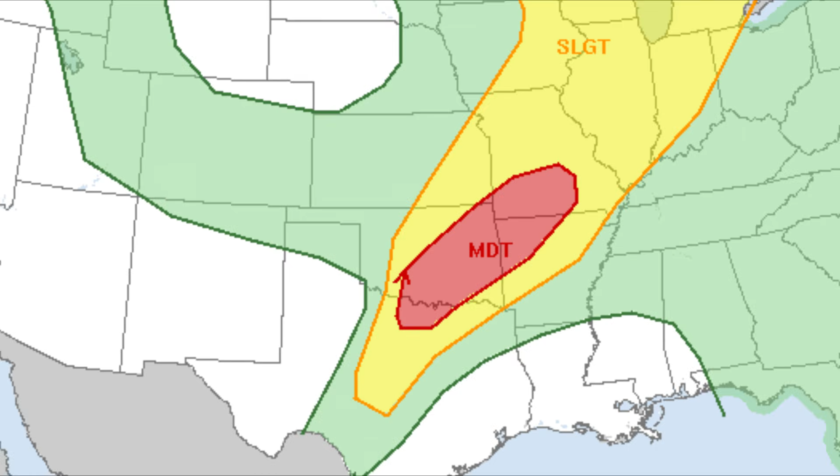Monday, May 20th, 2013. Forecasters at the Storm Prediction Center in Norman, Oklahoma, dial in their forecasts over their own homes as conditions align for an explosive weather day. Within a highlighted moderate risk, a 10% hatched tornado probability is denoted through Oklahoma. Even with this elevated risk, little did anyone think central Oklahoma would see weather history repeat itself.

My name is Ethan Moriarty. I'm a mechanical engineer by training with a fascination in tornado damage forensics. This is a damage analysis of the 2013 Moore, Oklahoma EF5.

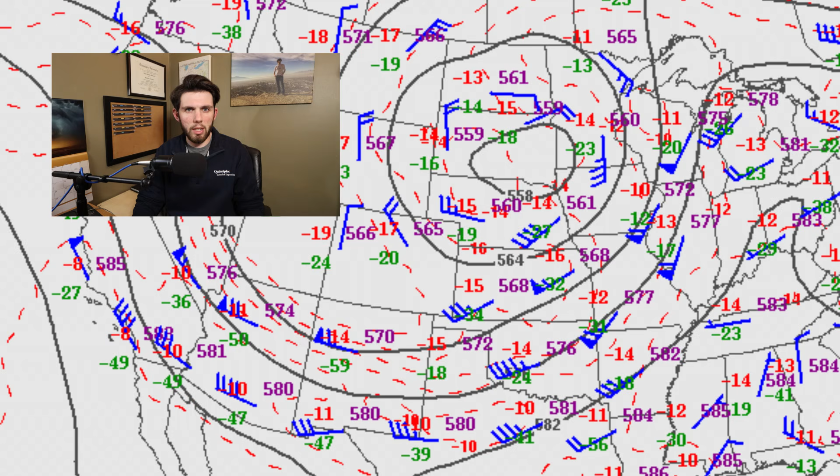Diving into the weather side of the equation behind this tornado, the system at large that was responsible for this tornado started with an upper level low over the northern plains of the United States. Associated with this upper level low was a giant digging trough that ejected across the southern plains and up through the Midwest. Moisture was abundant in the southern plains on this afternoon, with dew points reaching into the upper 60s and in some places even over 70 degrees Fahrenheit.

Associated with the strong surface low over the Dakotas was a stationary front that draped its way from the origin of the surface low down through Texas. Throughout the day on May 20th, there was an advancing dry line from western Texas that moved eastward into Oklahoma and eventually created a triple point over the localized low over the central Oklahoma region.

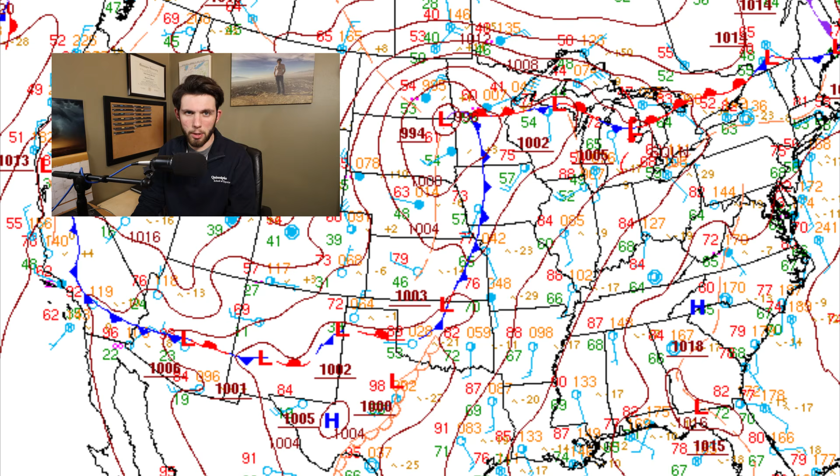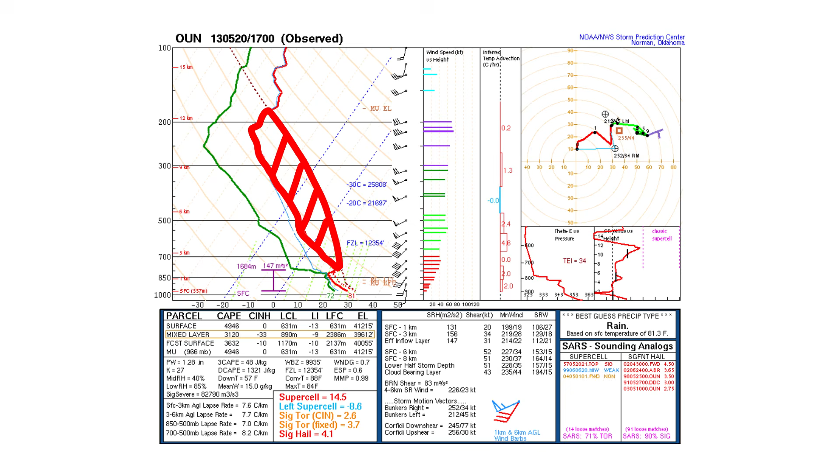A special midday weather balloon sounding was launched in central Oklahoma. This sounding revealed that there was over 3,000 joules per kilogram of mixed layer CAPE, as well as 5,000 joules of surface-based CAPE. The instability over central Oklahoma was rapidly growing, and the cap was quickly eroding away. Storms fired off the dry line a little after noon, and the storm that was closest to the boundary ultimately became the producer of the Moore EF5.

Now that we've gone over the tornado stats as well as the overall weather picture of that day, let's dive into the path itself and get an overarching look at the damage that was caused by the Moore EF5. Here I am quickly just zoomed out over the entire path. This one is relatively short compared to some of the high impact tornadoes that we've looked at previously. Some of them span 60 miles. This one's only 13, 14 miles in length.

And it is worth noting, due to the fact that this went through an extremely heavily populated area, there are well over 4,000 damage indicators in this path. So I have filtered a lot of the lower rated damage indicators out and left a lot of the EF4, EF5, and some of the unknown damage indicators in here because the sheer quantity of damage indicators is overwhelming.

This goes into how the survey was conducted. And this survey was an extreme undertaking. It required both ground survey teams and aerial survey teams.

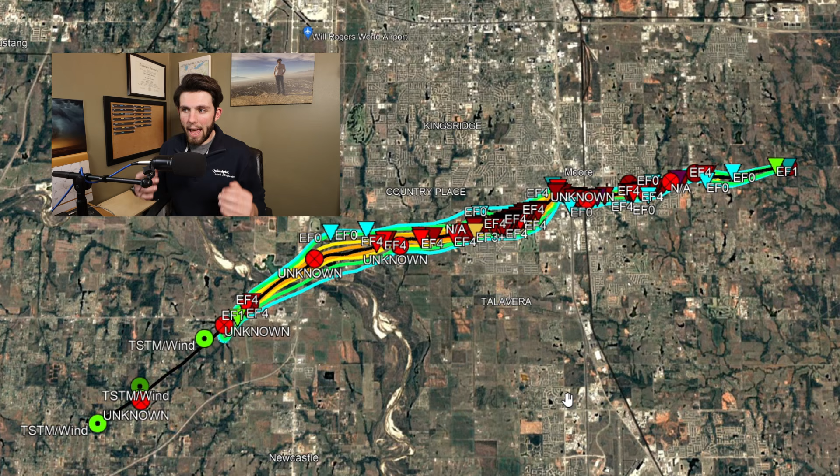So you had a lot of people on the ground looking at the highest impact damage indicators, and then a lot of aircraft involved that were kind of mapping the overall picture and a lot of the lesser damage indicators. So a lot of the EF1s and 2s, that type of stuff, were done through the aerial surveys. So it's not like there was a ground team that was reviewing those. They were focused on the heavily impacted damage indicators, if that makes sense.

Of course, after natural disasters, the natural human urge is to clean up a lot of the damage. So the survey team had a lot of data that they had to try to take in before people started really manipulating the scenes. So you have to give these people credit for being able to document this huge amount of data in such a short period of time. It is by no means perfect, but it is a nearly impossible task to begin with. So you have to take a lot of that in mind when we're looking at a survey that goes through a heavily populated area like the southern OKC metro.

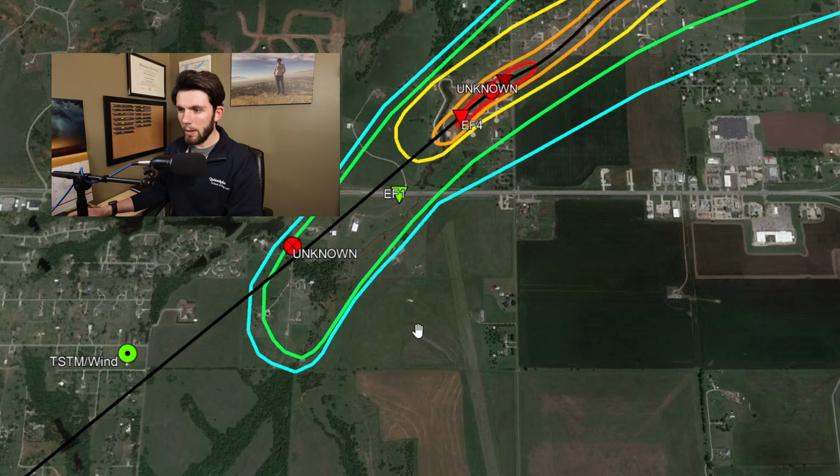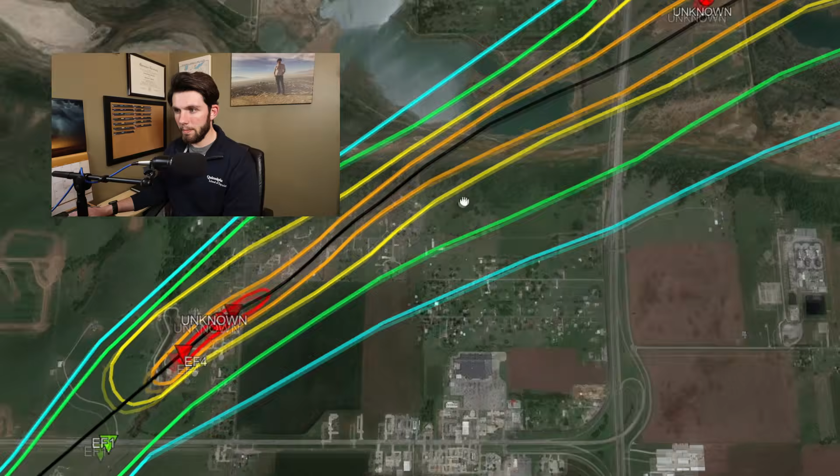Zooming in here to the first damage indicators, which happen in the northern section of Newcastle, Oklahoma. The tornado started just along Oklahoma 37 here and strengthened quickly, as we already have an EF4 damage indicator within the first kilometer of the path, I would say. Worth noting, from the original origin point of the tornado to by the time it takes its first real right turn, when that storm really latches on to the boundary at play, you can see how quickly it widened out in the initial phase of the tornado.

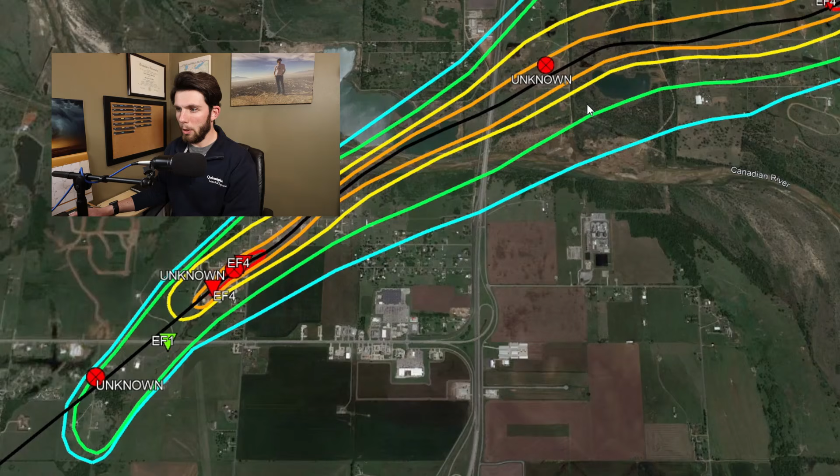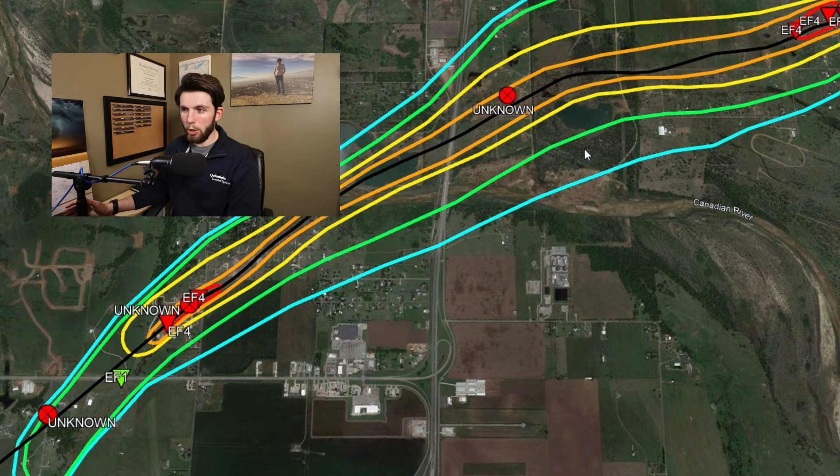So you went from the initial ground contact to almost peak width within a couple miles. So that's something that goes to show that this tornado matured very rapidly and was already at its peak strength basically before even entering the populated region of southern Oklahoma City and Moore.

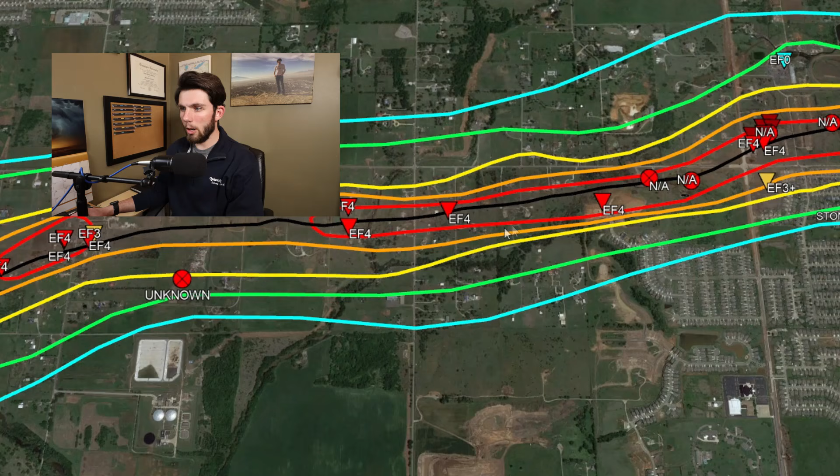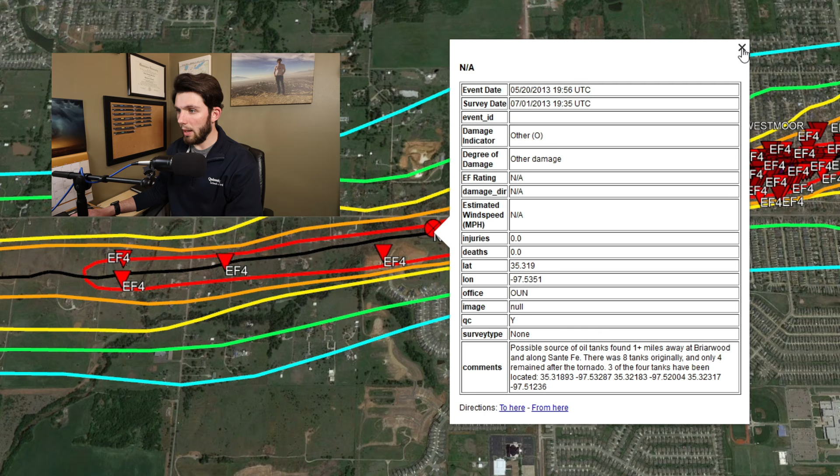In the southern Oklahoma City region of the tornado before it enters the town of Moore, there are a number of EF4 damage indicators and several interesting pieces of damage that we're going to dive into a little bit more in depth, including origin points of fuel tanks that were thrown in some instances over a mile. So we're going to look into what it would take to loft a fuel tank of that size, because fortunately we have geometry that they gave in the survey, as well as the weight. So that's really useful and makes our lives a lot easier. So we can look into what it would take to throw something of that nature such a far distance.

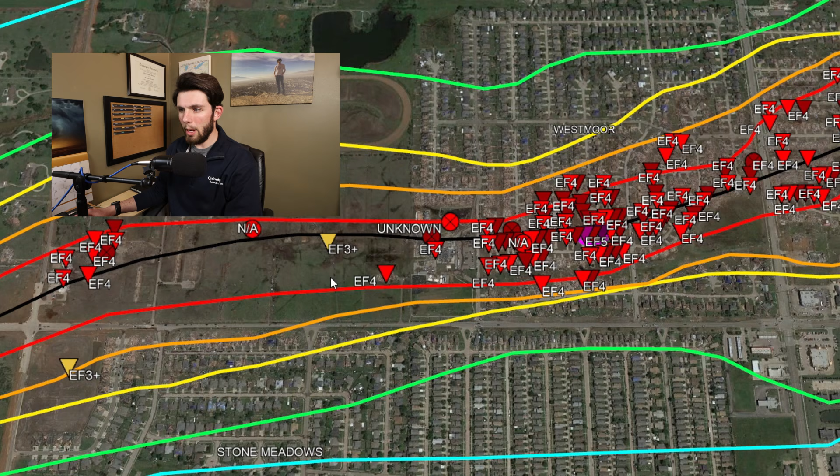Moving into the Westmoor neighborhood of southern Oklahoma City, this is where the Briarwood Elementary School was impacted, and some of the resting places of the fuel tanks that we were talking about earlier ended up being left behind. And then through the Westmoor neighborhood is some of the most intense damage of the tornado, including our first EF5 level damage indicators that were in the path of this tornado. It is worth noting that there are only 9 EF5 damage indicators in the entire path out of, I think, over 4,900 DIs in this damage path. That just goes to show how stringent the criteria is for an EF5.

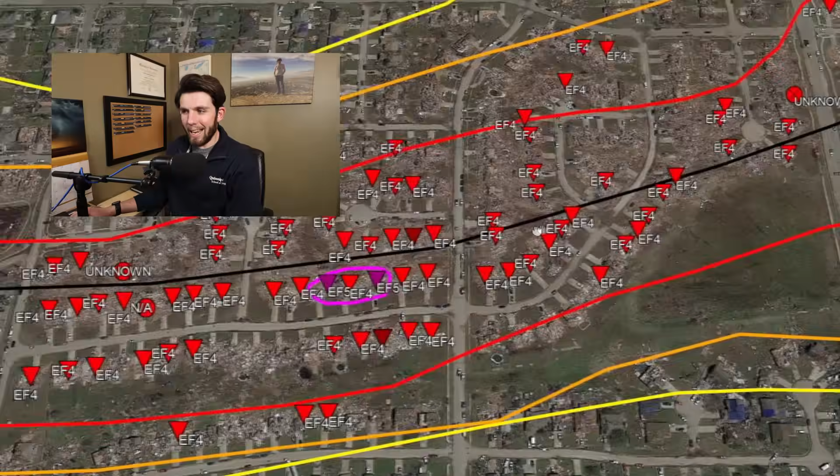And there's a good report on the survey and the damage overall that kind of lays the groundwork of what constitutes an EF5 damage indicator that I think is important to get into, but we'll get to that as we move eastward here. For the meantime, I think it goes without saying that the sheer amount of debris that is in this path is just overwhelming. And it is very hard to comprehend, and I'm not quite sure how to fully realize it. You know, I've been looking at tornado damage for a while now, and it is still hard to visualize.

I've never seen EF5 damage. The most intense damage I've seen personally in person is EF3, and EF3 is quite overwhelming. So to have an EF5 tornado through such a populated area is both gut-wrenching, pulls at the heartstrings, and is just overall depressing and hard to really materialize, to be completely honest, and really wrap your head around that something could be this powerful.

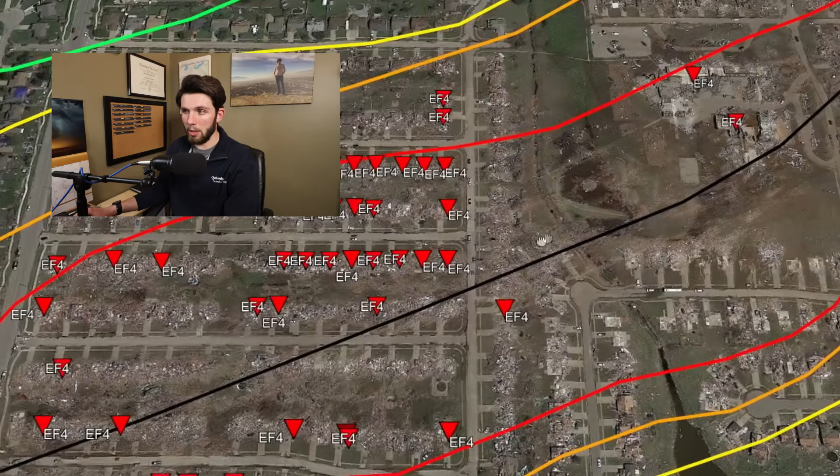As we move into the town of Moore, we pass the Plaza Towers Elementary School, which saw 7 fatalities at the school, which is honestly the most tragic part about this tornado, in my opinion. I mean, obviously, any loss of human life is tragic, but particularly at a school, that is really, really hard to deal with. And it's one of the saddest parts about this tornado. There's really no words that can be put to it, to be completely honest.

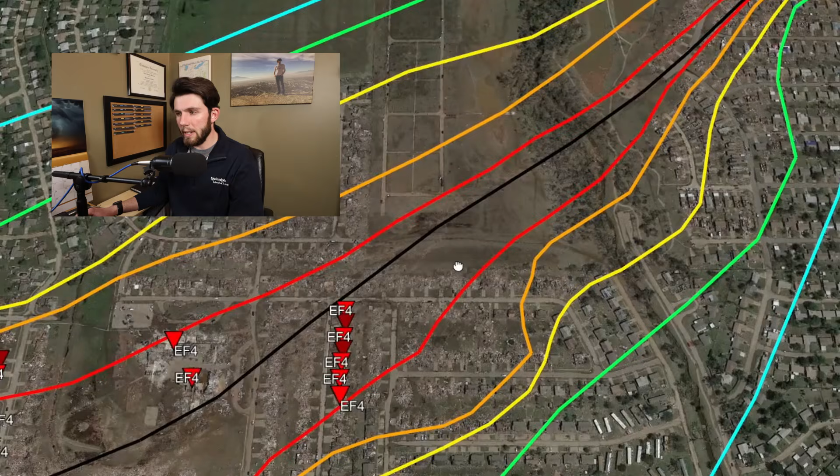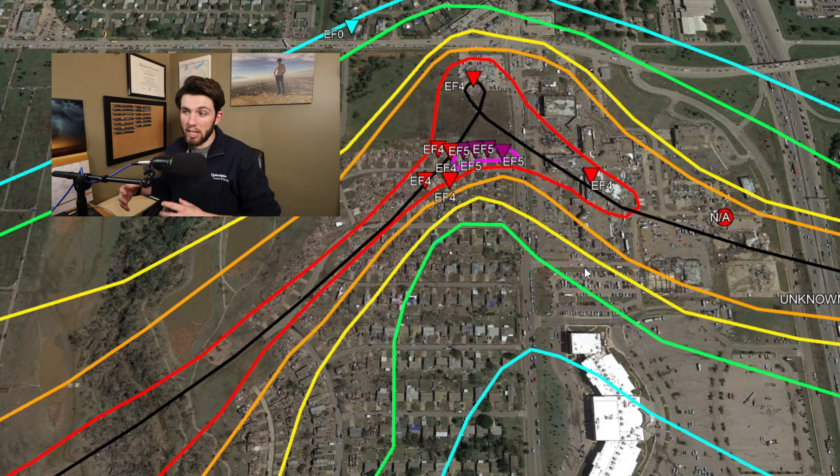The tornado would continue northeast again before executing almost like a loop style turn. I wonder if the storm cycled, or there was some sort of occlusion handoff type of thing between mesocyclones of the tornado. I'm not really sure. I'm not a meteorologist, so I don't really have a good explanation as to why there was this sudden kind of shift in direction that brought this tornado back in an easterly trajectory versus a northeast trajectory.

But I think it's worth noting that because the tornado stalled out here, there's a string of 5 EF5 damage indicators here. And arguably, I think these are the most conclusive EF5 damage indicators in the path, if you ask me. And it probably has to do with the fact that the tornado spent the most time as it executed this kind of maneuver over these houses. So it's no surprise that there was a concentration of EF5 damage indicators. There's also the gas station and convenience store up here in the corner that there were 3 fatalities at.

And then eventually, as it jogged back to the southeast here, it impacts the Moore Medical Center, where cars were thrown all over the place, mostly in the southeasterly direction. And it's also noted in the survey that 1 car was found on top of the Moore Medical Center on a 2-story section of it. So I think it goes without saying that an EF5 tornado is going to be throwing cars quite the distance. So it's completely within the realm of possibilities to have a vehicle that ends up on a roof.

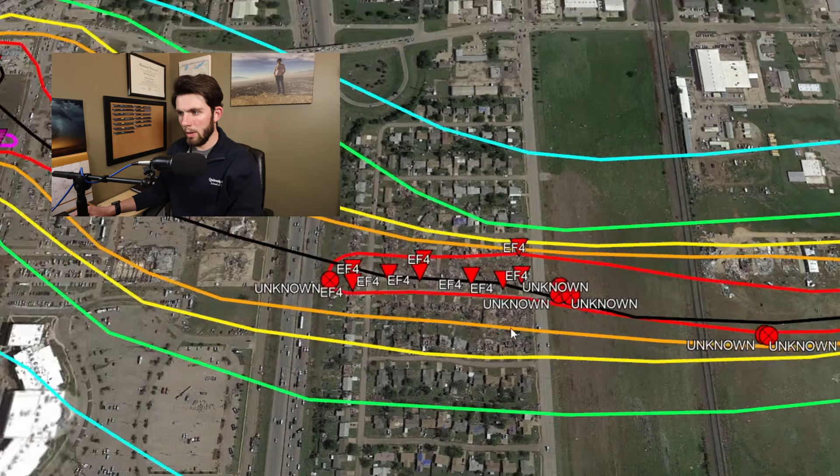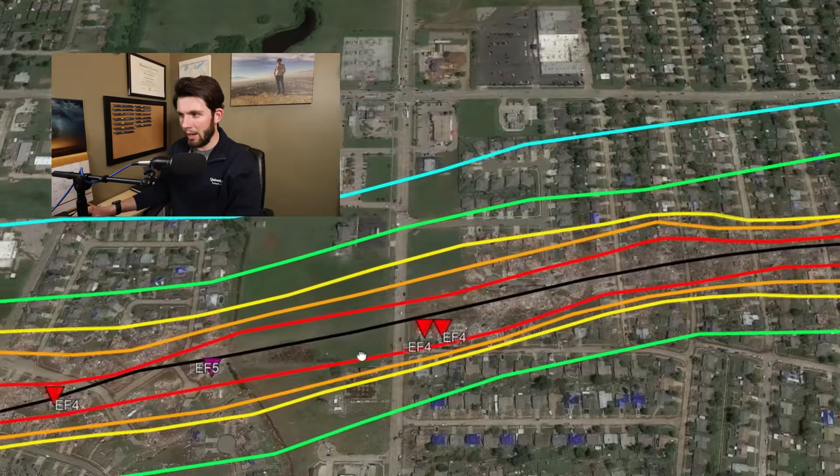The tornado then continues east over Interstate 35 and eventually makes its way into the eastern half of Moore. We still have damage indicators that are exceeding EF4. There's a couple more instances of EF5 along the track. But I think it's interesting here that the tornado kind of thins out a bit as it reaches this eastern portion of Moore. As you can see over here in the southern OKC region by the Briarwood Elementary School, there was a much wider swath of damage, even to the EF0 extent, versus what's happening here in eastern Moore.

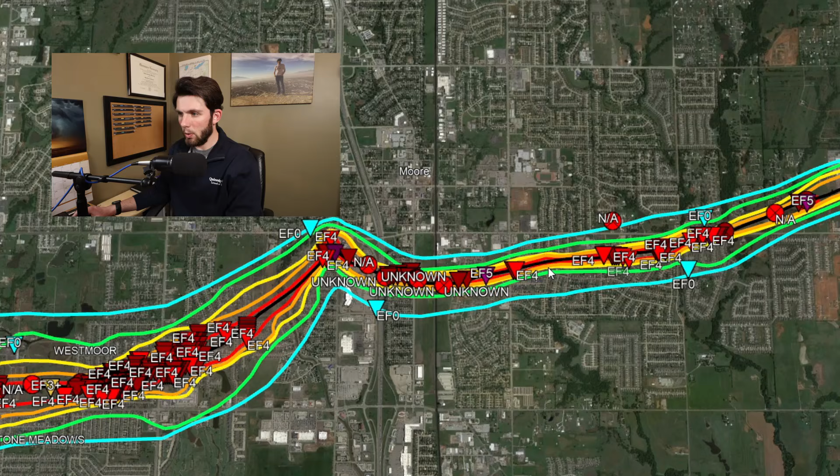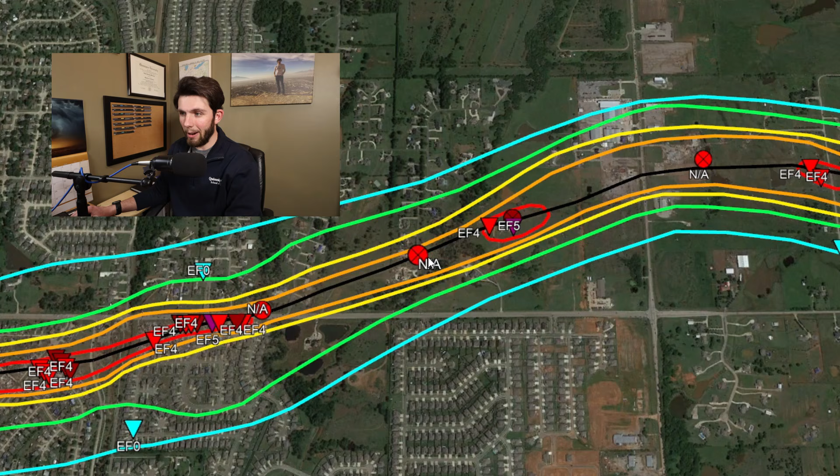Just something interesting. I wonder if that has to do with the cycling of the storm as a whole or something along those lines, but I just think it was worth mentioning that the width of the tornado actually kind of decreases towards the end of the path here. As the tornado finishes its way through Moore, it's still at very high intensity with a couple more EF5 damage indicators before finally reaching the outer limits of Moore and beginning to rope out and dissipate.

Now that we looked at the damage path as a whole and get a sense of where the damage was and where the key landmarks are, let's establish what the criteria was for an EF5 damage indicator. The criteria for an EF5 in the case of the Moore 2013 EF5 is spelled out in the official report of the damage survey, which is written by Donald Burgess as well as engineers like Tim Marshall. In the report, there are 4 criteria for a damage indicator to be assigned EF5. Reading directly from the report, let's look at the 4 criteria in depth.

Number 1, foundation swept clean with debris strewn some distance downwind. 2, foundation generally slab to base plate connections with properly spaced bolts with properly fitted, sized, and tightened washers and nuts. 3, removal of large percentage of those base plates from the foundation. And 4, anchor bolts that have been bent, which means that the frame had transferred the wind load into the foundation base plate connections.

The reason why some of this criteria was spelled out in the report is so that there was an equal measure to compare this to the May 3rd, 1999 event, which obviously was the landmark event for a high-impact tornado in the OKC metro area.

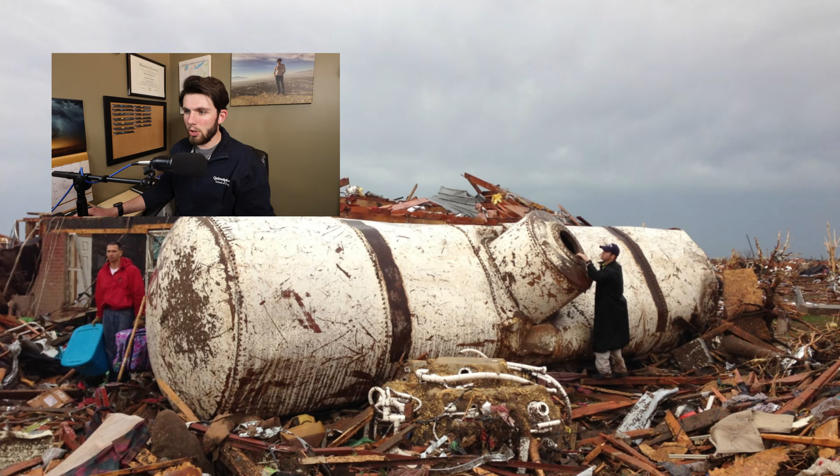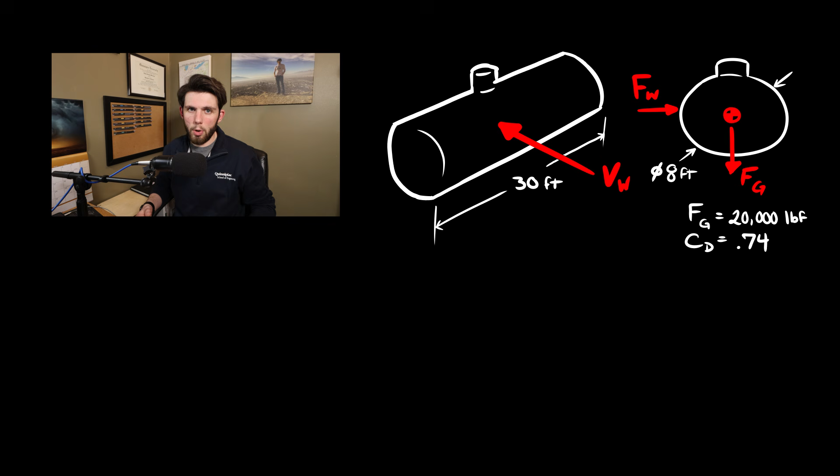Let us now dive into the propane tanks that were found thrown over a mile and see what it would take to throw something of that size and weight a significant distance. Here we are just east of the Briarwood Elementary School, where we have this unknown damage indicator which shows one of the propane tanks that was thrown from the farms further west. To start off, let's establish the geometry of the tank. It is 30 feet long with a diameter of 8 feet, and it weighed 10 tons according to the details in the damage indicator survey text field.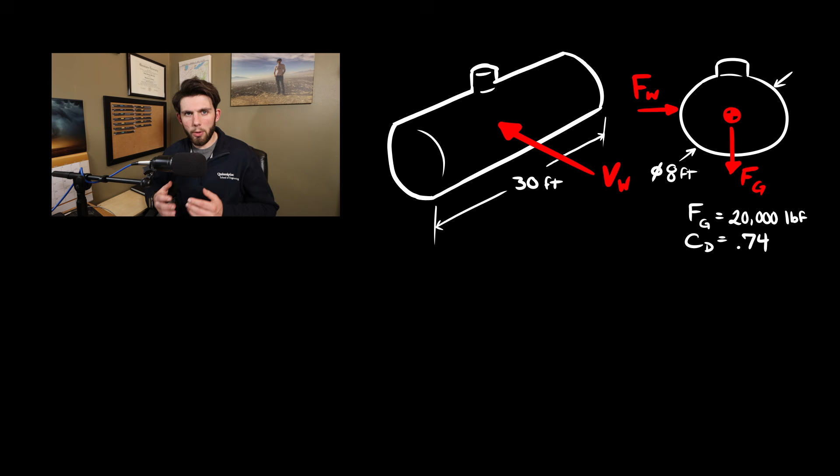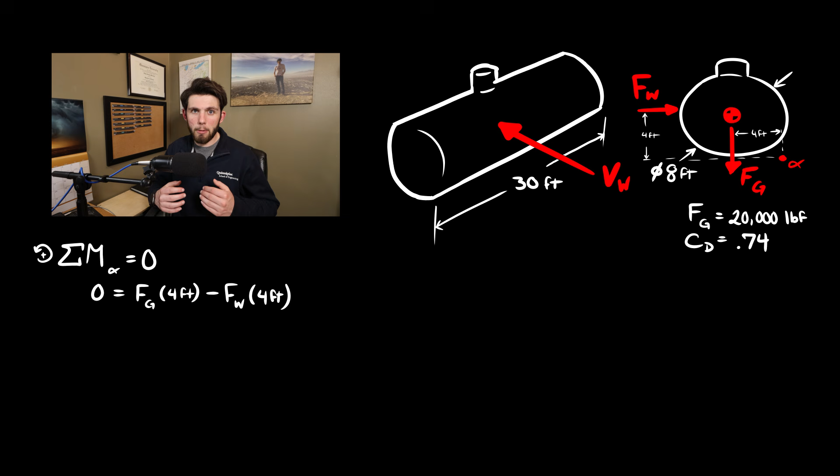To figure out how much wind force it would take to overcome the force due to gravity, we're going to compare it via a sum of moments. So once again, we'll pick a point where there's going to be a moment, and then we take the distances from that point to where the forces are applied in order to balance out the forces, and then compare the two.

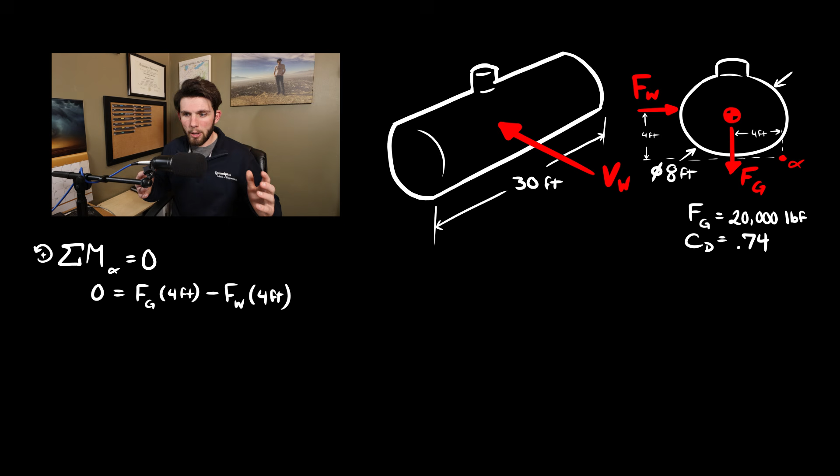So fortunately in this case, because it's just a cylinder and we're putting the tipping point at the same distances on either side, the two distances just cancel each other out, as they're both just the radius from the center of gravity of the tank. So ultimately, it's pretty straightforward.

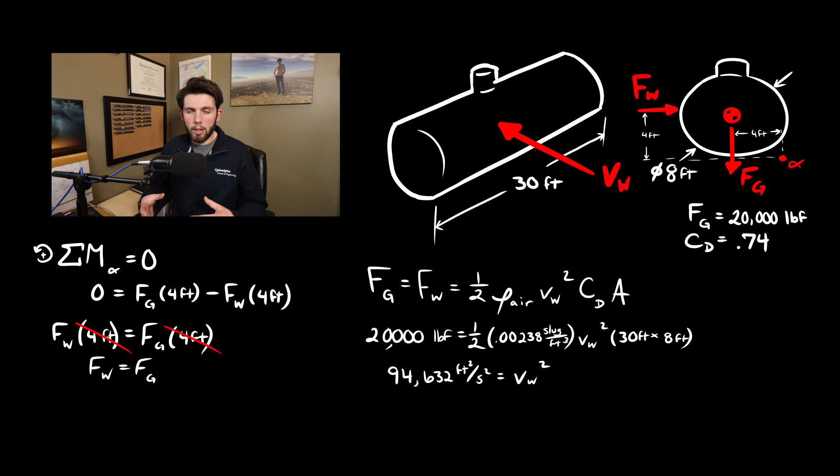We just compare the force of drag equation that we like to use with the weight of the tank and set that force of drag equation equal to the weight, and using the geometry as well as the coefficient of drag of a cylinder, we were able to build an approximate model in order to solve for the wind velocity that it would take to overcome that force due to gravity.

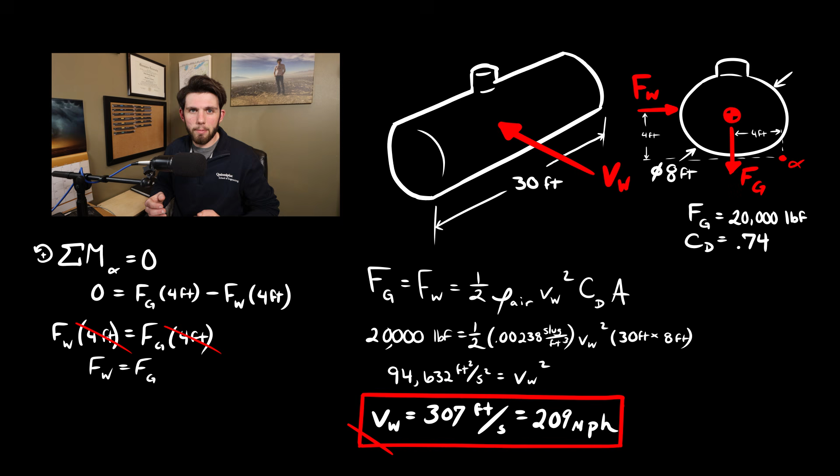Ultimately, in this simplified case, it comes out to 307 feet per second or 209 miles per hour, which makes total sense given that the rating of this tornado was at peak estimated wind speeds of 210 miles per hour. Keep in mind, these mathematical equations are completely idealized and simplify a lot of the geometries. So, obviously there's going to be some give or take with a lot of these numbers, a plus or minus tolerance, if you will.

But nonetheless, to throw a 10-ton tank over a mile, it's going to take a considerable wind speed. And I think it's safe to say, even though it is rated as an unknown damage indicator because it doesn't fall within the standard Enhanced Fujita scale guidelines, just from this simple analysis alone, it's capable of being an EF5 damage indicator.

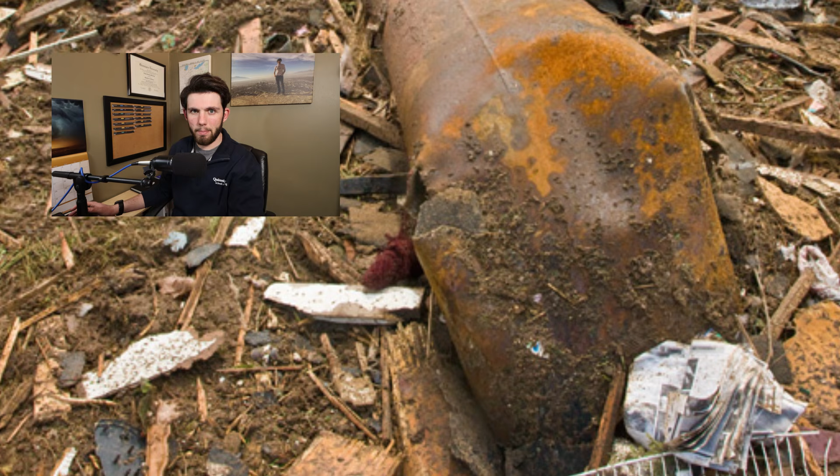Something tells me that it wasn't going to be an EF5 level echelon given the surface area of the billboard, but I wanted to break down the math behind it in order to show the science behind it and how we can derive and figure some of these things out without the guidebook to the Enhanced Fujita scale.

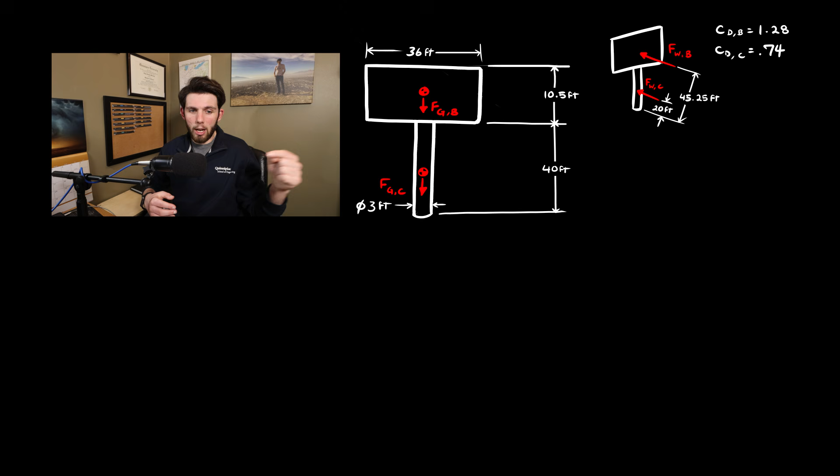If you watched my Rolling Fork EF4 analysis video, this is a very similar setup to how we analyzed the water tower. So we have a giant central column, the big cylinder that's supporting the billboard, and then the billboard itself. Both of these we're going to separate into their own separate bodies, each having their own weight vector. That way we can break up the moments about the base of the billboard, so we can measure the wind force to the center of both of those objects and use their appropriate coefficients of drag, as the two different shapes have very different coefficients of drag.

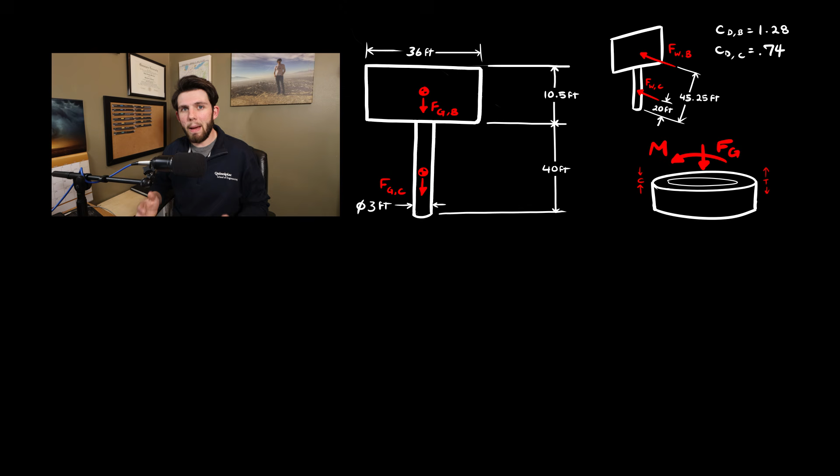Looking at the base of the tower here, this is where we have that failure point. It pretty much succumbed to the wind force due to a bending moment. So we're going to use our bending moment equation and compare that alongside the failure criteria for steel, which is the material used in the central column for the billboard.

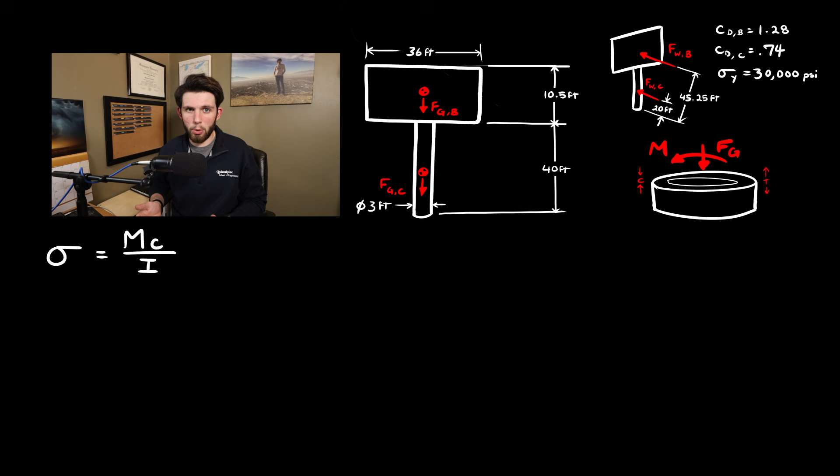After getting the weights, we have to find the normal axial stress that's taking place due to the weight of both the cylinder and the billboard. This way we can add a little bit more margin to the failure criteria, as that compressive stress is actually counterbalancing the tensile stress that is ultimately responsible for the failure. So because steel's yield is at 30,000 psi, this additional 260 psi from the weight can be added to it, as it's a compressive force that is counteracting the tensile load that's trying to tear it apart.

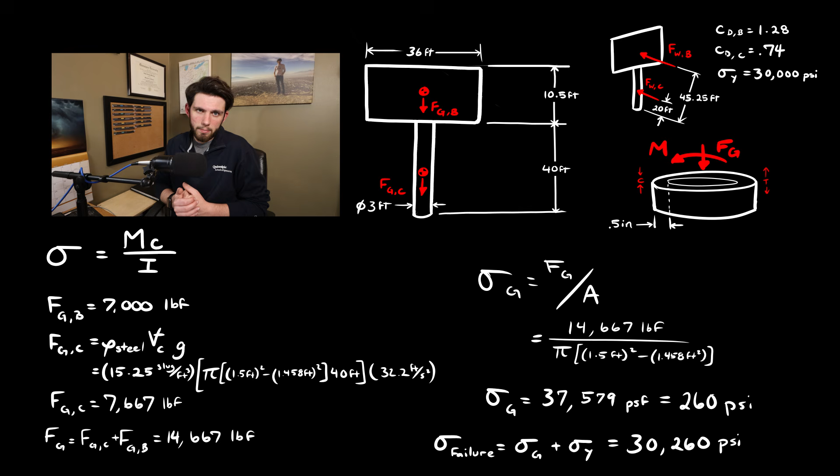In our bending moment stress equation, we have the distance to the neutral axis, which basically, from the center of the shape, the further out you go, the more that it's going to play a factor into the failure of the material. That bending moment is going to get larger and larger the further out in the material you go, so the failure is going to be at that outermost fiber. And then finally, there's the area moment of inertia, which takes into account the shape of the object that the bending moment is going through.

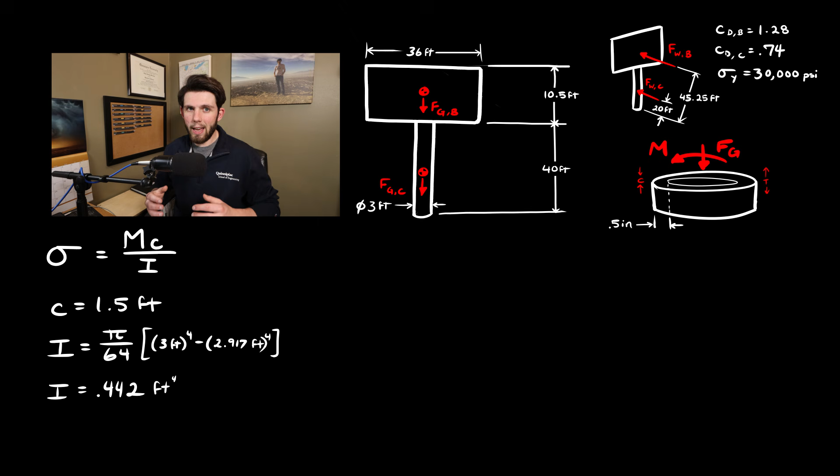So in the case of this giant steel tube, it's a giant hollow cylinder. So we solve using the area moment of inertia equation that is designed for a hollow cylinder. The two moments from the bending moment stress equation come from the force that's acting on the cylinder portion as well as the billboard portion, and then we take the distances from the center of both of those objects in order to get the complete moment that's acting on all of this.

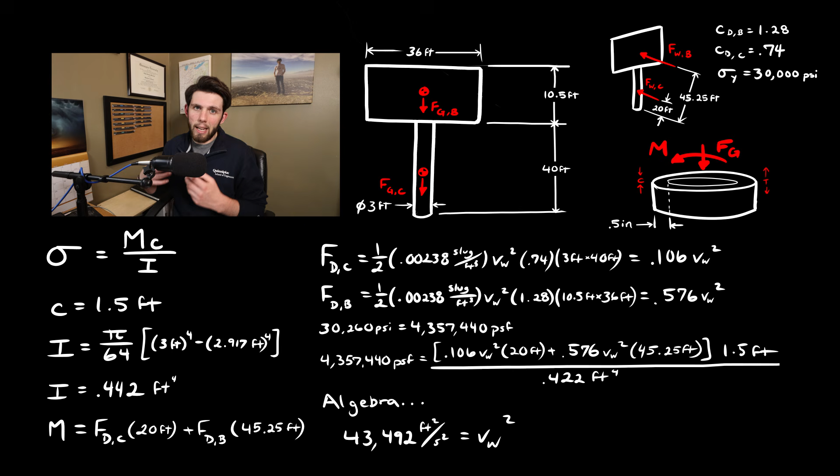Of course, the force equations for those moments still don't have the velocity term, as that's what we're trying to solve for. So that's when we have to do a little bit of algebra in order to take our failure stress criteria and compare that and reduce everything down in those force equations, the distance from the neutral axis and the area moment of inertia, reduce all of these equations down to isolate velocity.

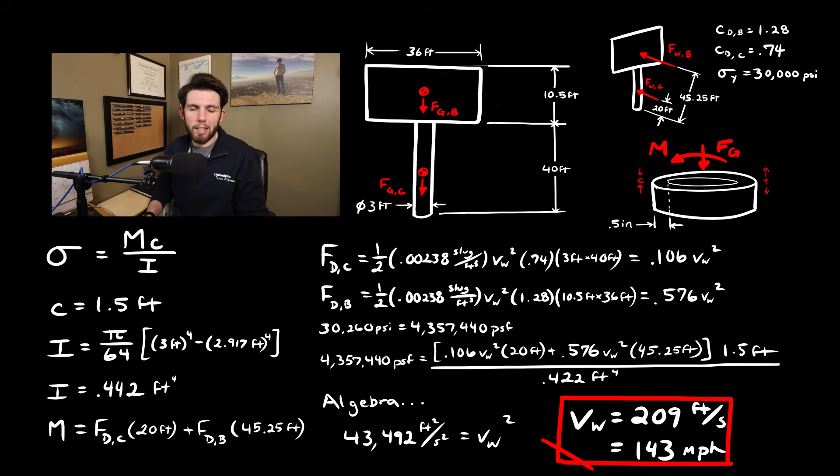Once we do that algebra and solve for V, we get a final result of 209 feet per second. And 209 feet per second translates out to 143 miles per hour. So if I was a damage surveyor in this instance, I would rate this failed billboard as an EF3.

So now that we've looked into some of these damage indicators more in depth, what can we gather as an overarching statement on the Moore 2013 EF5? I think the first important thing to emphasize here is just how rare it is for an EF5 damage indicator to be assigned. I think in the case of Moore, since we saw over 4,000 damage indicators surveyed and only 9 of them come out EF5, it's a very, very tall task in order to rate something EF5, and you have to be very clear and concise in terms of what is an EF5 damage indicator. And sometimes it takes that extra guidance in order to officially rate something EF5.

And, you know, in some of the instances that we've seen, like Rochelle, for example, you're working from a smaller pool, and with these high impact tornadoes in heavily populated areas, you have an extremely large sample size, and it becomes much more clear in order to say definitively that something is an EF5. In the case of the Rochelle-Fairdale tornado, you didn't have that sample size, so it becomes a lot more difficult to conclusively say something is an EF5. And that's just one of the shortcomings when it comes to the scale. We've talked about it a lot in these damage analysis videos, that the scale is not perfect.